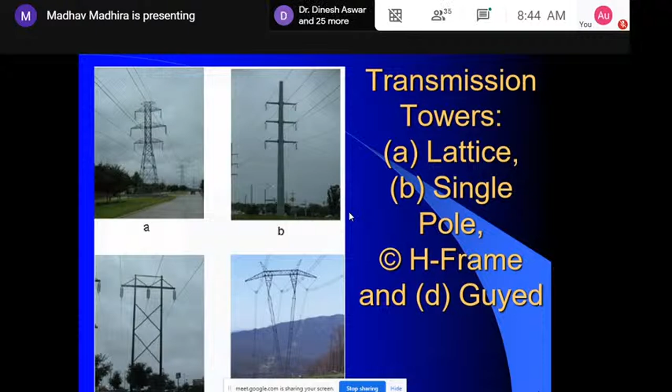Once you have a large lateral force, you end up getting a large moment also at the base. Many times it's a very challenging task because the gravity load is much smaller, while the weight effect of these lateral forces is not.

Many times it's a very challenging task because the gravity load is much smaller, while the weight of these lateral forces can be 2 meganewtons at a height of something like 90 to 120 meters. So imagine the moment, it will become something like 220 meganewton meters at the top of the tower, and if you look at the bottom, you have to add another 40 to 50 meters too.

These transmission type foundations on the ground, some of them use inverted T type, but generally they are not adequate, so we end up going for pile foundations too. All these footings are supported by piles. So this gives you the kind of picture that you have.

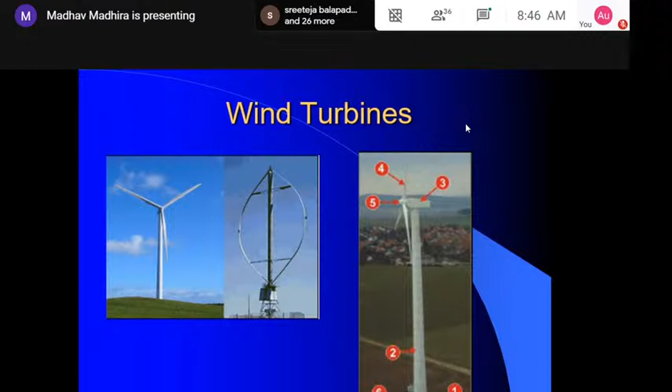We are not going to look at that part of it, but we may have to design, if you have a vertical axis wind turbine, for torques too.

Now all these piles, the kind of stage that it has gone up, you can see the height, how it is increasing, and you have very, very tall wind turbines.

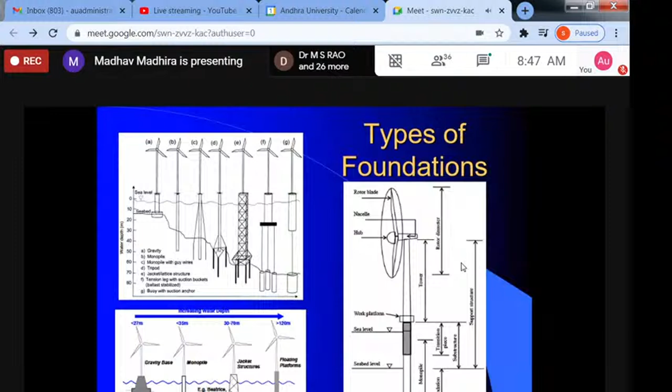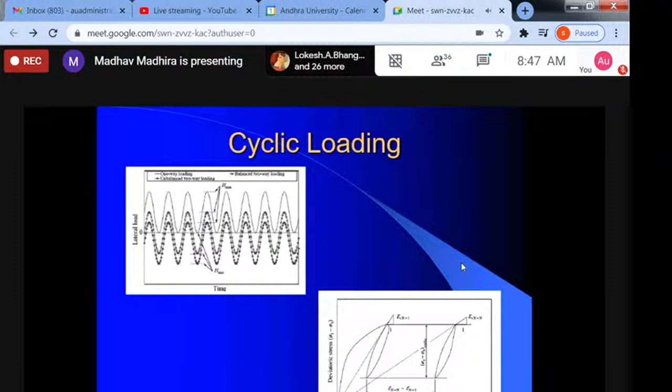I believe now they're about 120 meters high from the sea level, and this gives you the kind of challenge. All these wind turbines are subjected to cyclic loading because the wind is not there all the time, or the wave action is not there all the time. So you will be getting a cyclic load effect, in which case the stiffness of pile soil interaction starts degrading.

As you can see here, initially it could be some value. If you go for a number of cycles, you'll end up getting what is called the pseudostatic one, which needs large lateral displacements. If you look at the bottom one, you can see a large lateral displacement, after which it may behave pseudostatically.

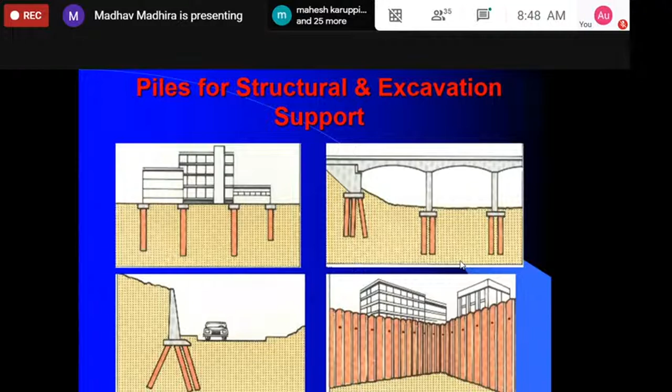Similarly, if you have a deep excavation, we go for sheet piles, diaphragm walls, secant piles, etc. Here again, because the soil has a tendency to move once you start excavating and removing the soil, you will have forces coming onto the pile because of the soil movement. So here it's excavation support, and the pile loading is due to soil movement.

These are some examples of pile walls for retention. And this is what you would see in most cities where people are going for 3, 5 basements in a tall structure. Imagine 5 basements means 5 into 3.5 or 4, a 20-meter excavation.

There is one deep excavation for metro, wherein it was something like 40 meters. And you had to provide either diaphragm walls, secant pile walls, or contiguous pile walls, and they're all subjected to the soil pressure. So you had to take care of that.

We are also using this, this is an example from Hong Kong, but we have done that in a couple of places in the Himalayas to support the slope, which is likely to move and fail. One of the ideas is, why don't we have pile support to the slopes? And if you have a tall structure or residential area next to a slope, you want to make sure the slope failure doesn't occur. One of the best things would be this.

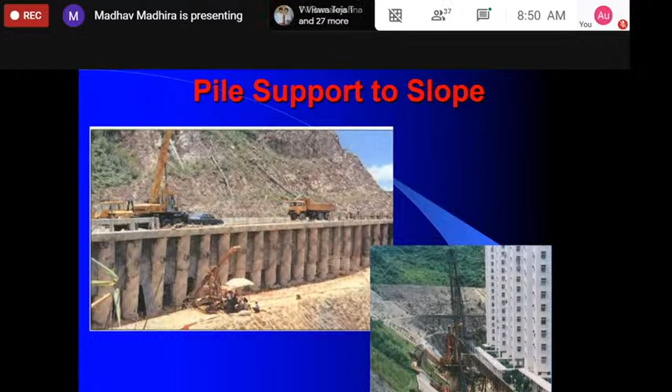Way back in 1970s, one of the dams in Himachal Pradesh had to be stabilized because of a shear zone they found out during construction. There was no way to change the design of the dam. So we had to provide deep well foundations to take care of the lateral forces in the slope or the shear zone. So this is how they work.

Most of the slopes are generally stabilized with piles at the toe, and this is where you can have even large diameter bored concrete piles. Off late, of course, we are able to now use some geosynthetic gabion walls to stabilize the slope, but this is a very common one in case you find that the surface support is not good enough.

So in an embankment also, below a bridge deck, you have to take care of it because the abutment is subjected to large forces. So they have piles below the embankment to take care of the lateral forces.

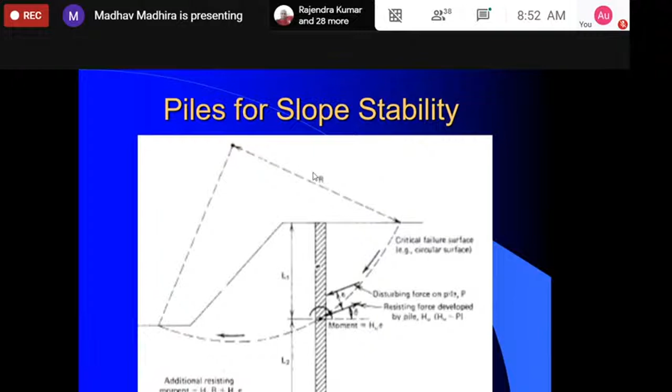So this is a very challenging one because the calculation of load in the active zone is much more difficult, because it's not a structural load, but a load due to movement, and we don't know how much. We're also using piles to resist ground movements associated with tunneling.

Whenever we have a metro tunnel, you may obviously have both vertical and lateral movements towards the excavation. No amount of care will prevent these lateral movements because even with tunnel boring machines, some movement does occur. And if you have a structure near the ground surface, it would obviously be subjected to these movements.

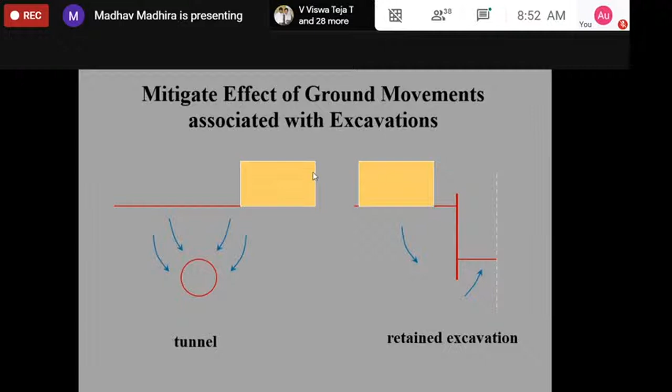So one of the best ways would be to provide reinforcement. That means you provide piles so that the building is not affected to the same extent. You may not be able to prevent it 100%, but you have to take care of it.

Just to give you an example, in Singapore, for one of the tunnels, if there is any building near it, the maximum movement they allow was 1 to 2 millimeters. That's all that building is allowed to deform. And the same thing is happening even here.

Essentially a project for a metro pillar—next to it, they wanted to do an excavation, and we had to provide a very, very complex support system, including micropiles, anchors, nailing, etc., so that the maximum movement a metro pillar can undergo is hardly 1 to 2 millimeters. If it is more than that, the track gets distorted and the trains get jammed or derailed.

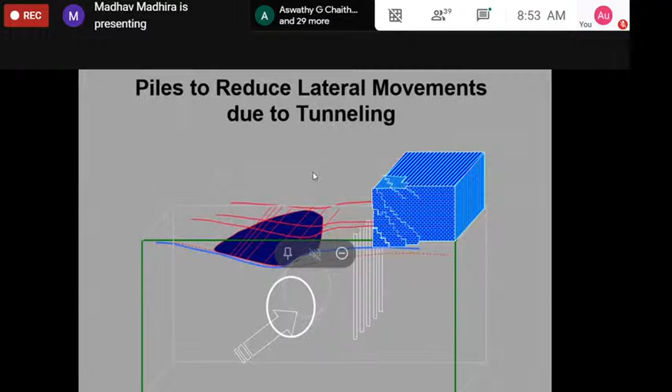So that's the problem. In addition to all this, we have the seismic forces, and they're all generated in the ground, which means the building is subjected to lateral forces because of the seismic action. The seismic wave moves up from the bottom towards the building, and you will have a lot of attenuation or magnification, particularly if you have soft soils.

So it's not as bad, but you still have to design for these accelerations, which are of the order of 0.12 to 0.16 for zone 3 and 0.08 to 0.1 in zone 2. You have to take care of these forces.

So when I'm looking at piles which are subjected to lateral load, the first classification we look at is the length. Depending on the length, we classify it as short, intermediate, or long.

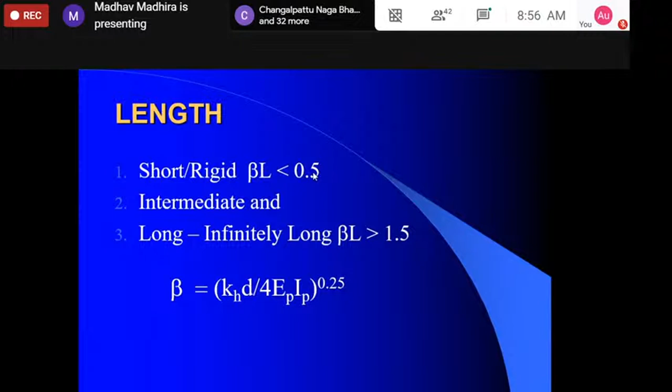One of the simplest ways in which we classify—you define a parameter called beta, which is nothing but the coefficient of subgrade reaction KH times the diameter of the pile, divided by 4 EP IP. EP is the modulus of elasticity of the pile material, IP is the moment of inertia, and we take this product to the power of 1/4, and that gives beta. Beta has units of 1 by L.

So if you have beta times L less than 0.5, the pile is treated as a short rigid one, which means it will just rotate, not deflect like a beam. If beta L is greater than 1.5, then it becomes infinitely long, which means it's fixed at the bottom, and only the top would be deflecting. The intermediate one is where you have deflections or deformations right from top to bottom.

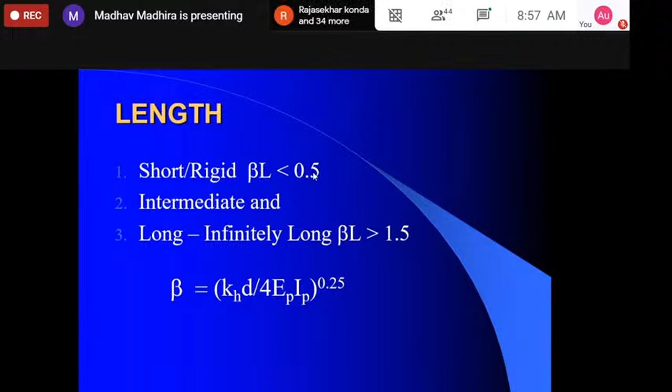Now, this classification depends on different methodologies we have. You may find different ones too.

Now, in terms of restraint, the head can be free, which is what you have in case of transmission towers or single pole ones, whereas most piles we have, which are embedded in a pile cap, the head is prevented from rotating, but it's allowed to translate. Please remember, when I say fixed, it's only fixed in the sense of rotation and not in translation.

So it can move laterally, but the shape is exactly the vertical one at that place. Similarly, at the base or the tip of the pile, if you do it, it's a floating pile.

I drive into, let's say, an Indo-Gangetic stratum where I have no hard rock. So even if I have a 20, 30 meter long pile, the bottom is free to deflect or rotate. That means free. Suppose I end up getting a very strong hard stratum, and I drive the pile hard into 1, 2, maybe 2, 3 diameters, then it's prevented from movement but allowed to rotate, which means in our beam theory we treat it as a hinge connection or pin connection.

Now, if I socket the pile into hard rock, maybe something like 5 diameters or more, then the pile tip is not allowed to rotate and displace. So that is true fixity with respect to rotation and displacement. Because of the beam action, these are all necessary for you to consider.

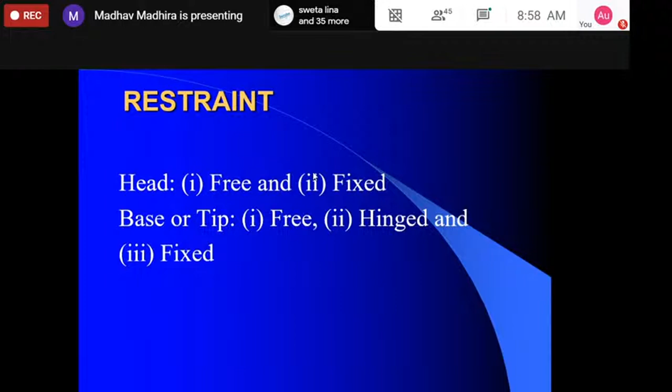Now let's look at the behavior of the piles, how they behave, in order to calculate the ultimate capacity. We have the classic theory of Broms, which I caution you is not valid anymore, but just now Professor Reddy said use IS code. I would rather ask you to use your judgment whether it is true or not. I want you to know that Broms came with this theory in 1964, ASCE. His experience at that time was based purely in Sweden, where they have extremely soft soils in some of the areas.

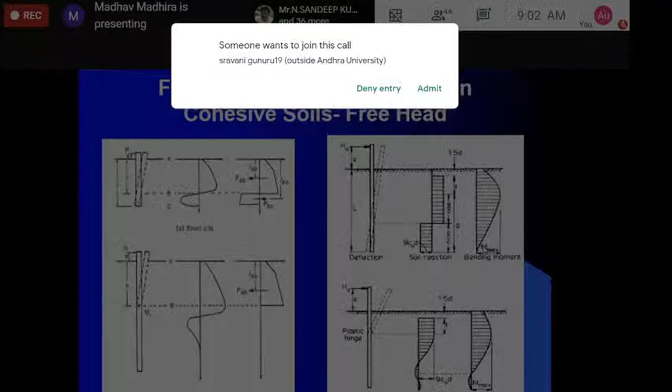Now imagine if the pile becomes longer. This bending moment keeps on increasing as you increase the length of the pile, and then you suddenly say no, the pile cannot take any more, it reaches its plastic stage and forms a plastic hinge.

If that happens, the mechanism is very different now. In the long pile, we treat the hinge here at some depth, and the pile rotates like a free one here because it becomes a short one. So you have this kind of pressure, and below is the other one.

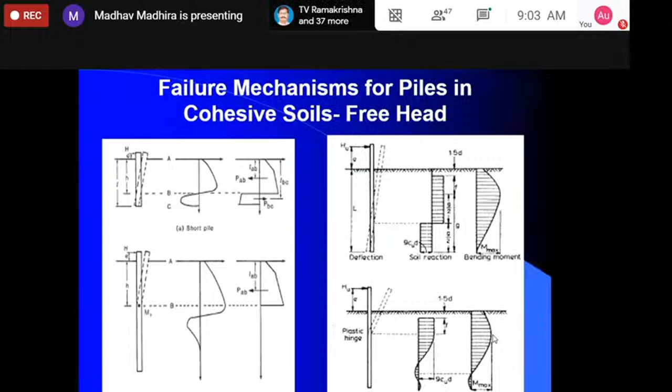You have to calculate now based on the plastic, what is the maximum bending moment or your moment. And this is how we do it in case of cohesive soils. Okay, that is for free head.

Now I want you to look at the fixed head one. So here we have the pile embedded in a pile cap, and the load is applied here. Because it's a short pile, it rotates like a rigid one, which means with the H, it simply translates to the right.

Now, if it is an intermediate pile, or you have the moment so high because of fixed end moment, it can form a hinge here and it rotates again as before. If you have a very long pile, you will end up getting a hinge at the pile cap and another hinge somewhere in between. So this is what happens for short, intermediate, and long piles in cohesive soil.

In each of these cases, I want you to look at the kinematics or mechanics. This is the soil reaction, and you can see the bending moment too. Because of the fixed end and all the load is here, the maximum bending moment occurs at the top. So the first hinge can form here as you keep on increasing the length of the pile. So for very short piles with no hinge, we use this kind of mechanism.

With intermediate piles, possibly one hinge here and then rigid below. So this is the kind of soil pressure distribution. These are all according to Broms' theory, which has been later modified by several people.

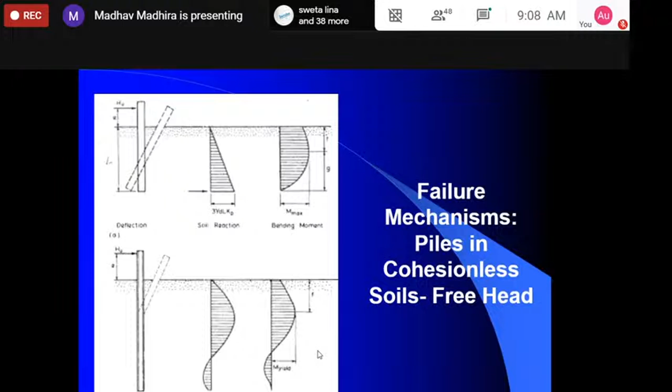This is a free head pile in cohesionless soil. If I have a fixed head pile, you can see very similar mechanisms. You have simple translation at the top.

So it's very easy to calculate the reaction in this case, linear increase, and H is equal to the area of this triangle. Please note that the lateral pressure is 3 times Kp times gamma into Z or gamma into L. And the maximum moment, the negative moment, is here.

If you increase it, you end up getting the first yield moment. And if you have a very long pile, you will end up getting two hinges, and we still do the same analysis. The analysis is very simple, but the mechanism is very important. So you have to be very careful with these two.

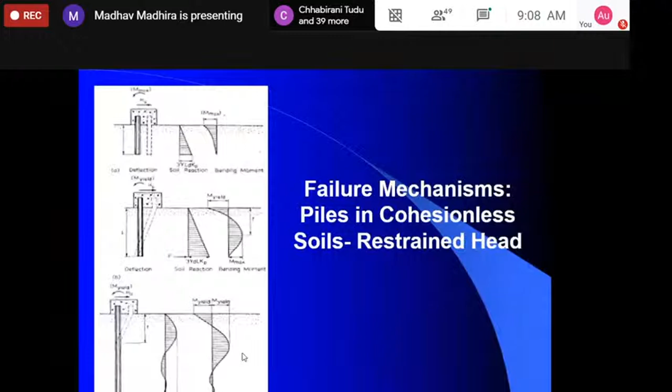If you have a socketed pile, I told you, if the socket is short, you end up getting a point of rotation. It's fixed, but it's allowed to rotate. And in the rock, you end up getting very large lateral forces, and we integrate for that. When you have a very large, long length, you can get a hinge here, and then you get this mechanism.

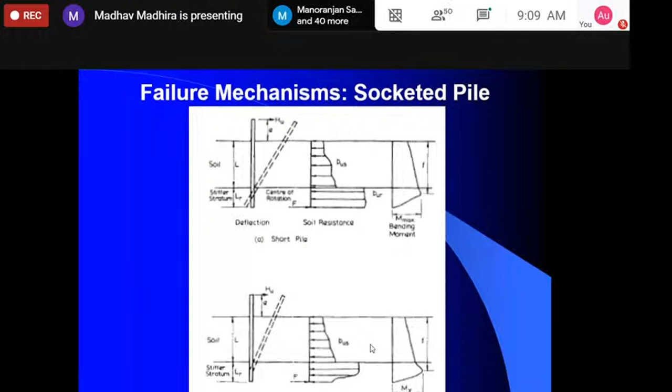Please note that here the socketing is very similar to the depth of penetration into the ground. Based on these, we have all these design charts available in our code also, but all of them are based on Brom's theory. I want you to look at the chart depending on the embedment, which is nothing but L by D ratio, against which you have ultimate lateral resistance in cohesive soil, P by Cu into D square.

Cu is the undrained strength, and D is the diameter. So you have a non-dimensional ultimate lateral resistance. It's a function of eccentricity, so E by D. As you increase eccentricity, obviously the moment increases, the capacity decreases. You will realize that P by Cu D square can probably be as high as 60 for maybe L by D of 14, 15, etc. It can reduce by a factor of 2 to 16 once you have a large eccentricity.

It's not a big thing in terms of eccentricity because the diameter of the pile is 0.6 to 1 meter. So if you have a tall structure or a single pole which is going up to 15 or 16 meters, you get E by D there. So you can calculate using this.

If you have a fixed head pile inside here, then the effect of eccentricity is not there. So simply you get it as a function of L by D, and you get fairly large restraint. You'll end up getting P by Cu into D of the order of 50, even for L by D equal to 8. Then you may say, what happens after that? Then suddenly you will get hinge too. So these are the kind of charts that we have.

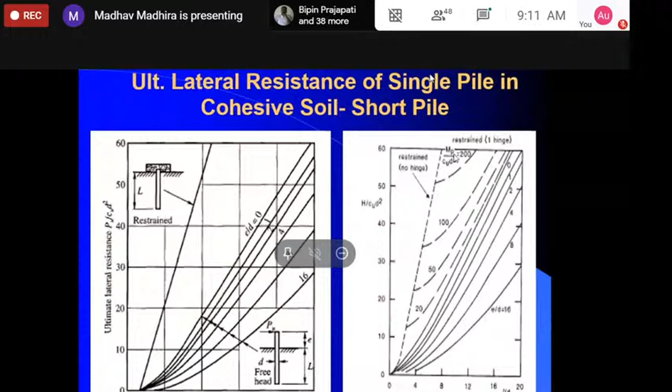So these are the charts that you have for piles in clay. These are for long piles, you can see here, and very similar ones too. What I would like you to do here is, on the right side we have long piles. This is yield moment by Cu into D cube, and it can vary from 1 to let's say 100 or 1000. H by Cu into D square is now restricted to a much smaller value. You can calculate for different eccentricities, and these are all charts available in our code. You can easily use them for your design.

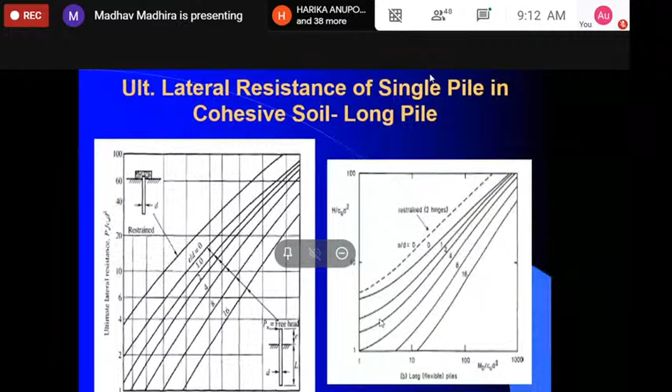For cohesionless soil, the analysis is very similar, but the quantities are very different. Again, here as a function of L by D and a function of E by L, these are for free head piles. Here you have the lateral force, the horizontal force normalized by Kp into gamma into D cube. Please remember, gamma is unit weight of soil, so let's say it is grams per cc. You need to multiply by D cube to end up getting a force, and you normalize it.

You calculate Kp as a function of angular shearing resistance: 1 plus sine phi by 1 minus sine phi, a very simple expression. Here is our pile with eccentricity E. For E by L equal to 0, that means at ground level, the normalized lateral force is close to 200. But once you have eccentricity of the order of 3, it reduces to even less than maybe 45 or 50. And if you have rotation here at the top because of fixed head with one hinge, here are the design charts that we have for coarse soil.

You'll find them in the book or any of the codes you will find.

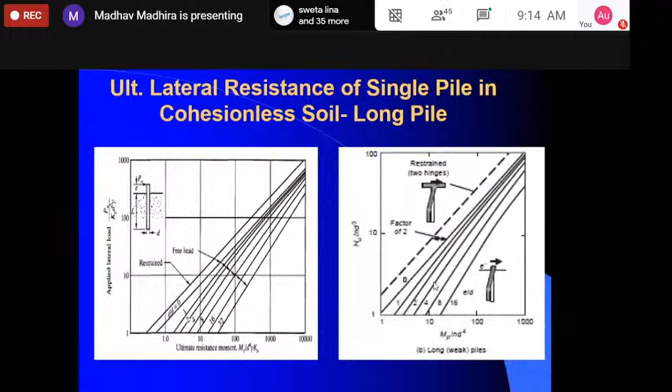In case of long piles, you have the ultimate yield moment normalized with Kp gamma into D4, because this is the yield moment. So with Kp gamma D4 and your normalized lateral force, you can see a curve for restrained head and free head values for different eccentricities. This is for long, weak piles, which means you have double hinges, and you have a different chart for this based on how you analyze - using L by D, the yield moment of the pile, and the eccentricity of the load, and based on that you get these results. What we found is that many times the lateral capacity is not enough.

People ask what should we do to increase the lateral capacity. One way is to increase the number of piles, but that is very expensive. So what we often try is to provide additional support through a sand or gravel blanket so that the top is restrained, or for the pile, like a vane, attach blades.

Doing this also by increasing the plan area, so when it rotates or deflects, you have more area resisting. A very common one, which we have been recommending, is to have a collar.

Recently we had a problem where the capacity was very low in a particular port structure. We said, why don't you increase the diameter of the pile at the top, so that will give more resistance. The pity is that in case of piles, it is only the top that controls. You may have very stiff soil at the bottom, but its contribution to capacity or reducing displacements is much less, because the pile is a cantilever, and cantilevers have large deflections - that's the problem.

You can also excavate around and pour a concrete plug here. Some people suggested, why don't you provide a beam? But this is possible only in case of a port structure where the direction of the lateral force is fixed. Then you can provide a beam to stop it from moving.

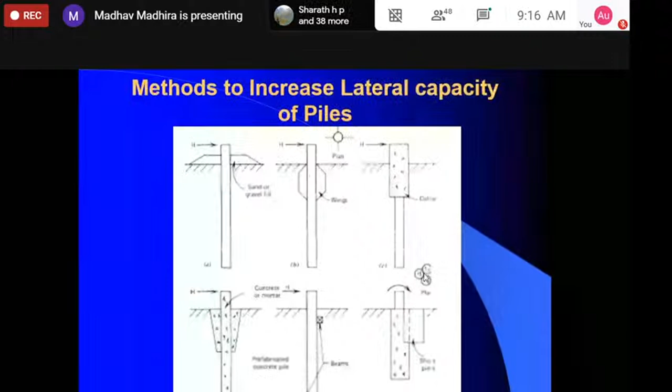Similar to that, we have a short pier next to the right, taking the lateral force too. So these piers can be provided in this fashion. These are alternate ways in which you can improve the capacity.

How do we do the analysis? As I said, the pile is a beam, and we need to find out its response. One of the simplest models is what they call the Winkler model, given way back in 1885 or so. He said to replace the soil with a set of springs, and the spring coefficient is called the coefficient of subgrade reaction. So we put the pile and then springs along the length. The original Winkler model has all the springs unconnected, which is again a limitation.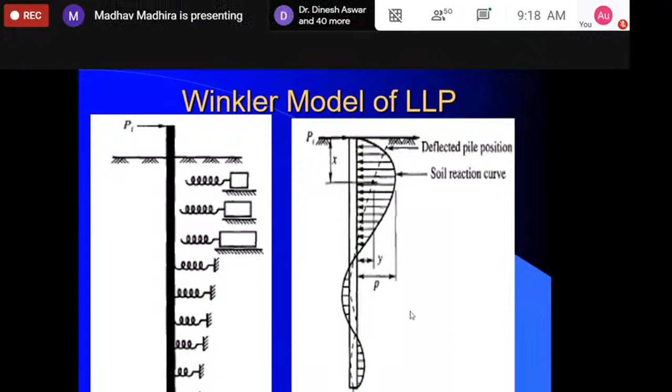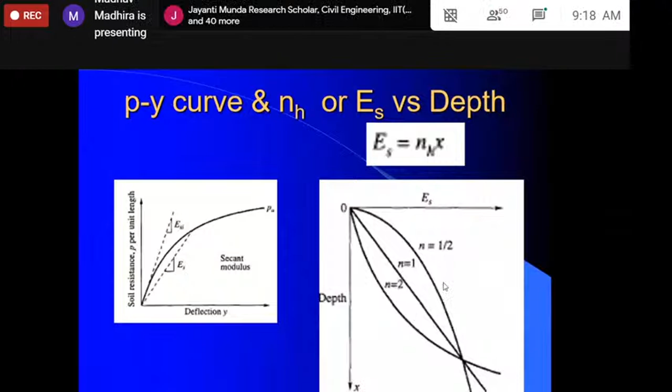Now, when I do this, I do a simple load test - a lateral load test, wherein I have deflection and the soil resistance, the P-Y curve as they call it. P is the soil resistance, normal force or normal stress on the pile, Y is the deflection. When you do a simple laterally loaded plate load test, you may get a curve of this kind.

The problem is that the initial portion is very steep, so you get a high tangent modulus, but actual displacements are large, so you may have to use a secant modulus value. Please remember, the modulus of subgrade reaction is not exactly a constant. You have to look at it in terms of displacement.

Now, when you come to sands, obviously at the top there is no restraint, so the modulus or coefficient of subgrade reaction is 0. It increases with depth, and it can increase in any fashion, non-linearly, but most of the time we assume a linear increase, meaning the modulus of deformation or subgrade reaction increases linearly with depth. We use this parameter NH, the rate of increase of modulus.

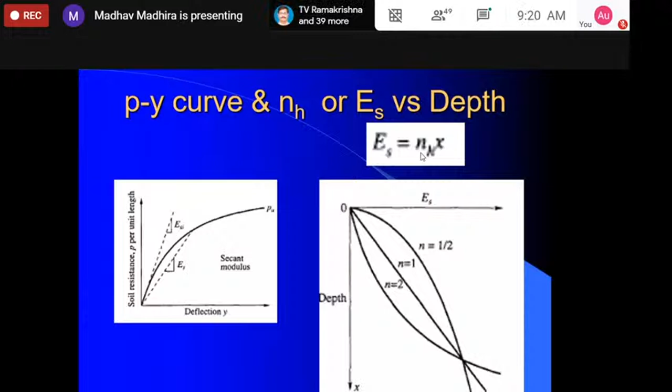So we had to analyze this, and this is what I want you to realize. As I said, the pile is subjected to vertical force, moment, and horizontal force. At the top, the deflections are very large.

Two things can happen: both the lateral capacity increases, because at greater depth it can be more, and the stiffness is more too. So the non-homogeneity is very important in all pile analysis. If you go deeper, you can see the PY curve is much steeper and you get larger capacity. So this spring constant honestly is not a unique value.

It depends on the depth. It depends on the soil at different depths too. So we have a lot of choices that you have to make in terms of choosing these parameters.

So I picked up some of these correlations which are available from the literature. If you do a simple plate load test, I get the 300 millimeter plate, right? So I can get the displacement, and if I want to get the coefficient of subgrade reaction for horizontal condition, this is how they recommend it.

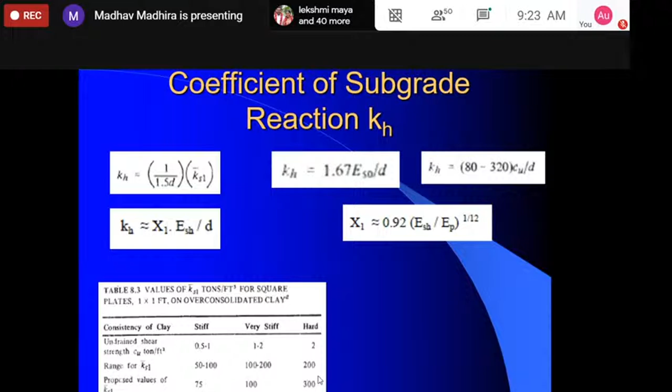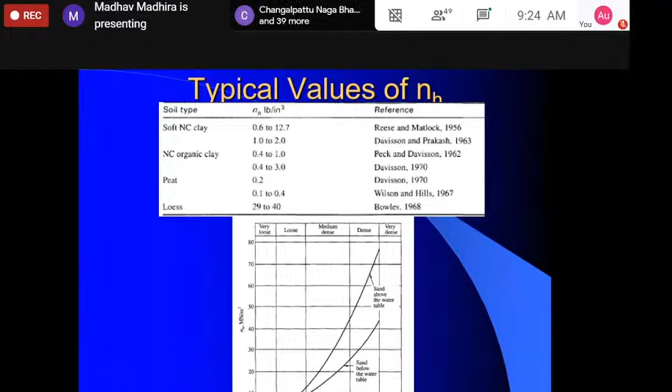The NH values are given again by the relative density of the soil. If you have sand above the water table, NH can increase from something like 10 for loose soil, relative density of 30, up to 75, and for very dense soil around 80. But below the water table, the values become maybe half to one-third of that.

So how do you estimate them? We use simple kinematics, a simple rotation or beam approach. For these deformation conditions, we have slightly different criteria for different types of piles. For a free head pile, if beta is greater than 2.5, you treat it as a long pile; for a short pile, beta should be less than 2.5.

If beta is less than 1.5, it is a simple rigid pile, and you can calculate the deflection and rotation very easily. The maximum deflection equals 4 times H into (1 plus 1.5E by L), where E is eccentricity, divided by KH into D into L. Please remember KH is the most important parameter here.

A structural designer will tell you what H and E are. As a geotechnical engineer, you decide on the length and diameter, but the most important parameter is KH - should you take KH at the top, somewhere below, or along the length? Use judgment, because that makes a big difference in all your predictions.

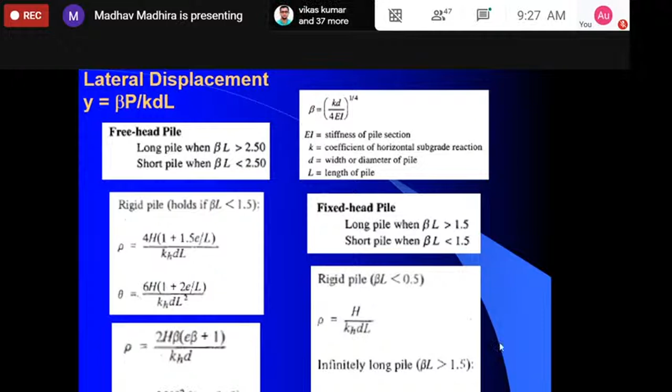These are the ones where beta is between, let's say, 1.5 to 2.5. You can see initially they're all constant because they're rigid piles, and once you have the large ones, it becomes redundant to look at it that way.

For beta L from 1.5 to about 2.5, you'll see it's a function of beta L. The coefficient of displacement is a function of eccentricity and the dimensionless length beta L, which we defined just now - it's the same value. So the more eccentric the load acting above ground level, the larger the displacement, which is very significant in terms of displacement.

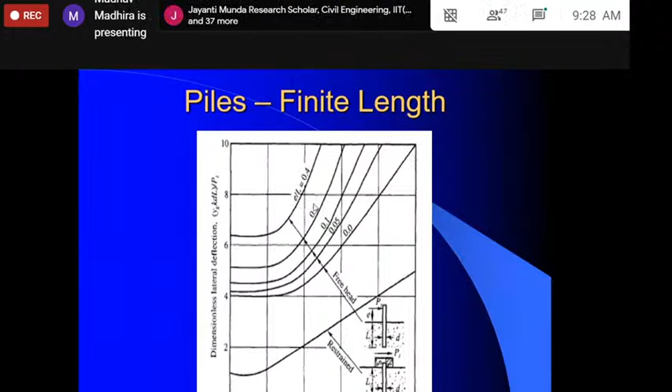Even a short pile with beta L equal to 2 will have this coefficient around 8 to 10, whereas if the eccentricity is very small, it's much less. This is how it goes for free head piles, and this is for a restrained head pile - once you put it in a cap at ground level with no restraint and no eccentricity, you'll have much smaller displacements.

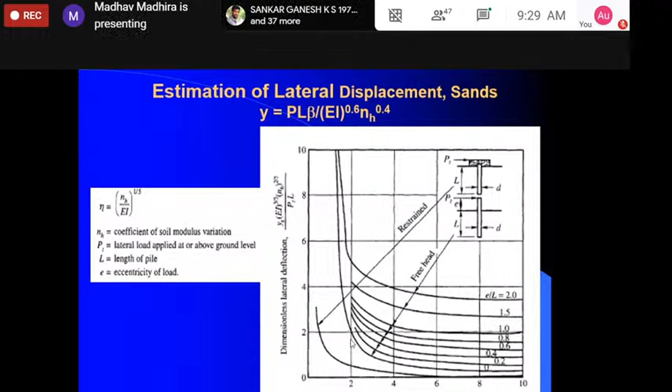Here are the curves for a free head pile at different eccentricities, and this is for the restrained head pile. So we use this chart to predict based on the Winkler hypothesis.

This is what we normally try to look at, and I would like you to look in terms of critical length. You can find out how much the critical length is from this simple expression, and for a homogeneous soil, we can use the simple expressions here for both lateral load and moment.

I told you only in terms of eccentricity, but if you want to separate out the effect of lateral force and moment, this is one simple way of doing that - same Winkler model, but the expression now is in terms of LC, the critical length.

If the length is more than the critical length, then it becomes significant and you use this value. So you have the contribution from the horizontal force and the contribution from the moment from this expression, and the rotation also is very similar. We can use the calculations to do that.

These are the expressions for non-homogeneous soil, which means sands, where the coefficient K is a linear function of depth. In this case, the critical length LC is defined in terms of NH, to the power of 1/5, and the displacements are for lateral force and the moment - this is what we use in our expression.

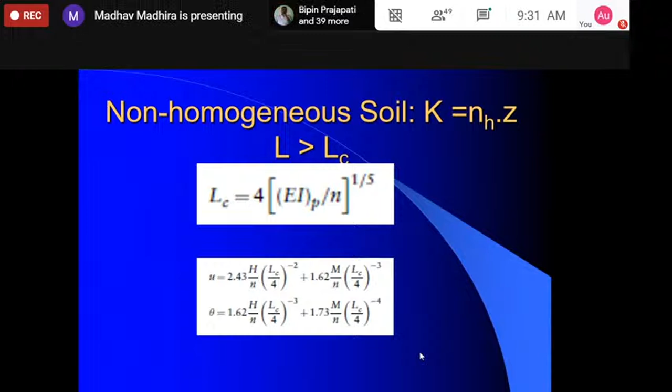However, we found that this Winkler model is not exactly good because soil is treated as a set of springs. Poulos, way back in the 70s, developed an approach now used in many design problems, and we use it in all our modern design checks too. The soil is treated as a continuum, which means it has a modulus of elasticity, and the springs are in a way connected.

I don't want to go into the design analysis of this, it's fairly complicated, but the best part I'd like you to look at is that the deflection is a function of modulus of deformation of the soil and length of the pile. This is the influence coefficient for displacement due to force, and this is for displacement due to moment, another influence coefficient. It's also given in terms of factor of safety with respect to ultimate load, so you are looking at elastoplastic deformations.

Rotation, theta, is given in terms of this, but everything depends on this coefficient Kr, which is nothing but relative pile flexibility. To me this is a very important parameter: Kr equals EP times IP divided by Es into L4. EP is the modulus of elasticity of the pile, IP is the moment of inertia of the pile material, Es is the modulus of deformation of the soil, which you can normally get, and L4 is length to the power of 4.

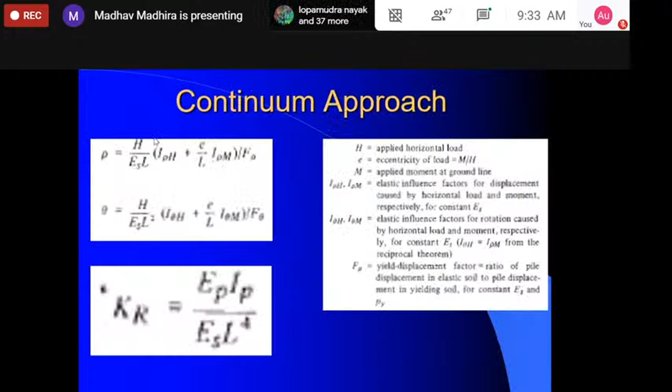This is what I'd like you to adopt in all your designs. For the free head floating pile, if I calculate Kr, as I showed, a very simple term, EP IP by Es into L4, once you have Kr, I can calculate I rho h, and substitute it here. Similarly I can do I rho m.

Here is I rho m, and you can get that, and here is I theta m, the influence coefficient for rotation due to moment. I want you to see here, once you have a very high value of Kr, more than 10 to the power of -1, it becomes rigid and the coefficient becomes constant. For intermediate or highly flexible cases, the I rho h keeps increasing, and below 10 to the power of minus 6, highly flexible, you can't have any design of pile foundation.

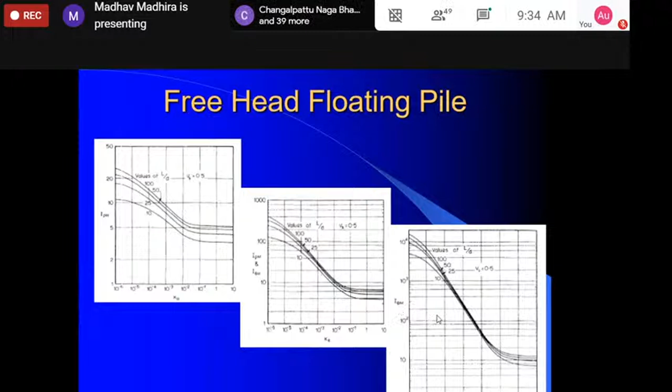The charts for I rho h, I rho m, that means influence coefficient for displacement due to moment, and using compatibility, it's the same as influence coefficient for rotation due to horizontal force, and this is influence coefficient for rotation due to moment. For the fixed head pile, we have very similar values too. You can see I rho F, there's no rotation here, and you have much smaller deflections, obviously, and the coefficient is very easy to calculate too.

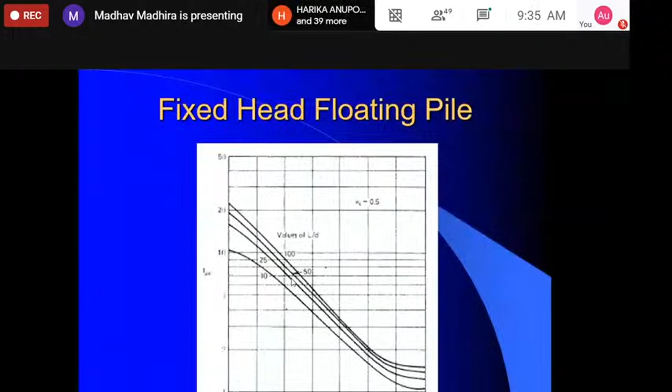So, as a function of L by D, usually our L by Ds are in the range of 25 to 50, so we can pick up any value in this range, or you can interpolate that too.

Now, when E is increasing linearly with depth, instead of Kr, we have Kn, which is EP IP by NH, the rate at which the modulus is increasing with depth, into L to the power of 5. So we have solutions for these two. I'd like you to forget the Winkler model. You may do it at the first iteration, but if you want to do a final design, go for this continuum approach, and we have influence coefficient due to horizontal force.

This is influence coefficient for horizontal displacement due to moment, or influence coefficient for rotation due to horizontal force, and this is influence coefficient for rotation based on moment too. All of them are functions of Kn, defined as EP IP by NH5. If you have a socketed pile, meaning driven into hard rock, hardly 1 or 2 diameters, then you can end up with two conditions.

If the socketing is very small, you have pin condition. If the socketing is very large, you have fixed condition.

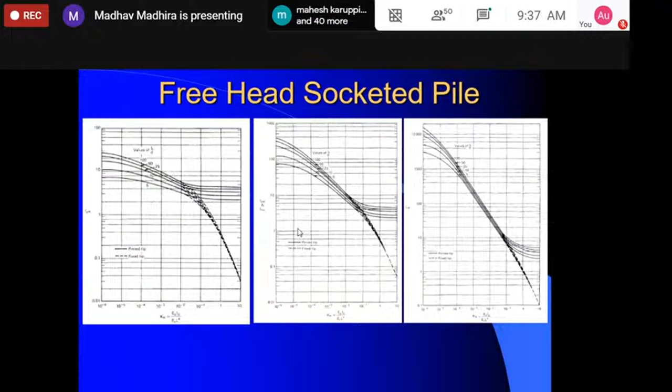So these are the design charts you will get from many standard books like Poulos and Davis, etc. We can design them. The other one I want to talk about now would be, what do we do in case

of buildings on piles due to earthquake? This is a very challenging job because once you have a building in a seismic area, our conventional belief is that providing piles will help. But please remember, if the soil here is fine saturated sand, it may get liquefied. So the damages can be very, very significant, even though you may have piles.

There could be two reasons. One is due to inertial force on the building, and the second would be the kinematics of the ground itself. And if the soil at shallow depths gets liquefied, which is what happens most often, obviously the lateral support is gone. Our coefficient of subgrade reaction becomes zero, the modulus of deformation becomes zero, and the whole pile system may not function at all. So the kind of different failures possible would be something like this.

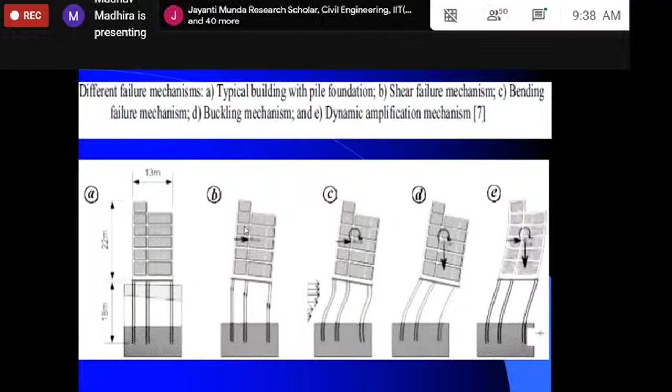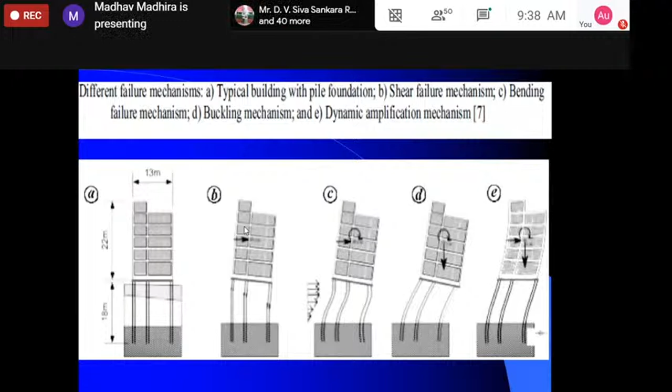Please remember, these are all the inertial effects. The effect of earthquake on the building would be to cause large displacements, large moments. So you can end up getting pile buckling, shear failure, bending, or even dynamic amplification so high that large deflections may take place too. So in general, if you have to design a tall structure in a seismic area, you have to be very, very careful. No matter how much you provide, the problem would be liquefaction.

And if you have a soil which is likely to get liquefied, what happens? There is hardly any resistance here. So if I look at the factor of safety, it is less than 1. I have fine sand, clayey sand, or poorly graded sand, so there is hardly any resistance to the piles. And you know that the resistance only in this region is important for lateral forces. So even though you have provided below a non-liquefiable layer, this is what happens most of the time. If you're designing in India, we did a few projects for Guwahati, and this is what happened. You will end up getting very low factors of safety.

And when we do the liquefaction analysis, look at the SPT-N values first. N values are all less than 10 to a depth of something like 8 to 10 meters. So obviously this soil is going to get liquefied. This is a clayey sand and fine grained sand. The factor of safety is less than 1, which means this area is going to be liquefied.

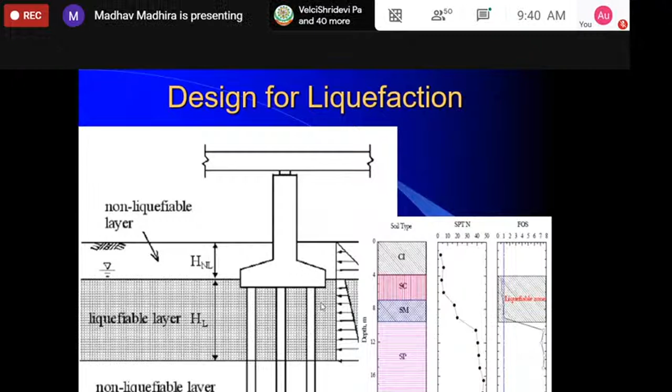So once you have liquefaction, there is hardly any resistance to the soil, and you will end up getting the whole pile within the liquefied zone acting like a cantilever. There is hardly any resistance. So you may have a very long pile, but the pile is now fixed only in the non-liquefied zone at the bottom. So you'll end up getting large deflections, and it's very, very difficult to design them for these earthquake conditions.

So it could be also both inertial and cyclic. The building is shaking, so it gives you inertial forces. You have the kinematics, the lateral spread, the soil itself is moving, and you will see the pile moving with the soil or relative to the soil. So this is the problem we'll have to design for.

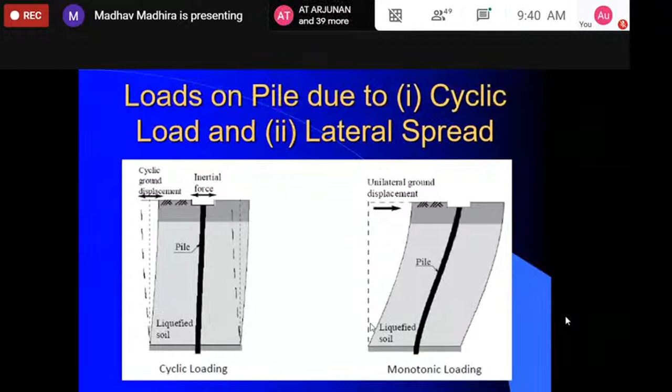So in order to do that, what people recommend is you try to calculate what is called the liquefaction potential index, which is a function of Fz, which is a function of your factor of safety against liquefaction. And then based on that, W is of course the displacement, or the way in which the displacement varies with it. So it decreases from 10 minus 0.5Z, and you calculate LPI. And if LPI is very small, let's say 0 to 2, there is no problem.

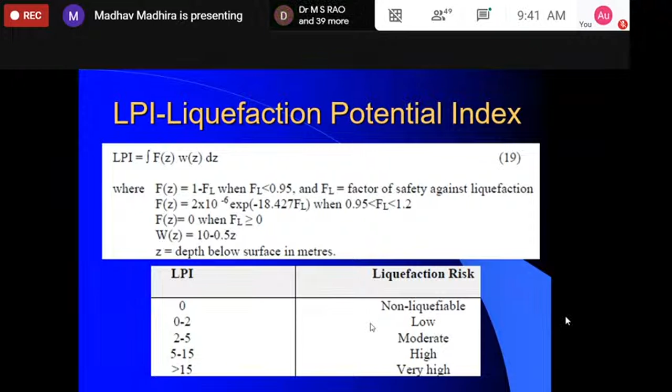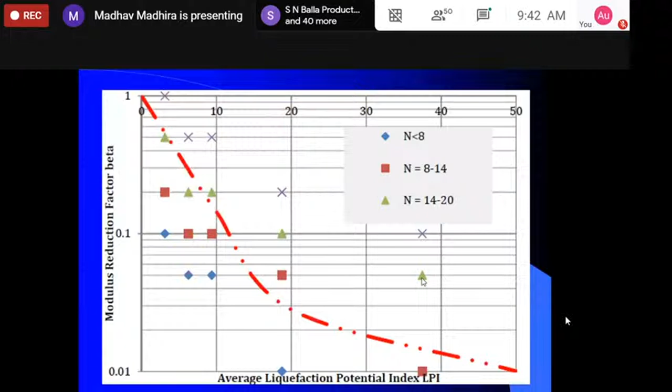So we had to be very, very careful in terms of designing pile foundations to take care of seismic load. You have very small subgrade reaction. It can reduce to something like 0.05, 0.02, which is a very small value. It doesn't matter even if N value is 14 to 20, it reduces, which means normally we say N less than 10 is where seismic liquefaction is very important. But even N equal to 14 has given us these values. These are the kind of predictions we get now, validated with experimental data.

So in one of the projects, they had bored cast-in-situ piles for a seismic area. I think this is probably where we talked about Delhi Metro. We also asked, can I prevent liquefaction by forming stone columns or gravel drains? We were trying to convince them that instead of providing bored cast-in-situ piles, why not use stone columns? It's also useful in terms of carbon footprint.

I don't know how many of you realize that when you use concrete and steel, the amount of carbon dioxide generated is phenomenal. One ton of cement to manufacture generates 1.5 tons of carbon dioxide. One ton of steel generates 2 tons of carbon dioxide. So if I can do a sustainable design, I would always recommend you go for that.

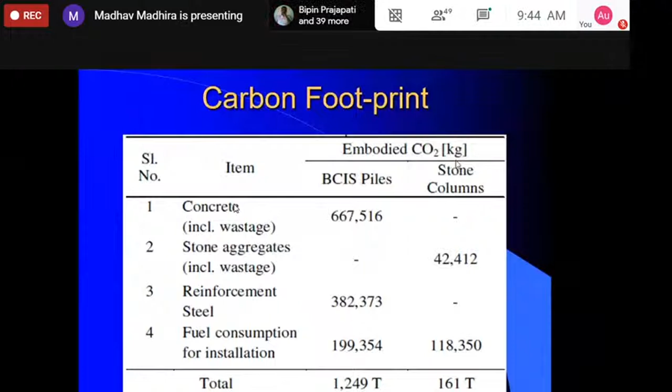For a typical project, if you work out the carbon footprint using bored cast-in-situ piles, for each pile you're generating a carbon footprint of 1,249 tons. Whereas if you go for stone columns, it's hardly 161 tons. Even otherwise, I would recommend we go for some ground treatment so that we prevent liquefaction rather than design for liquefaction. I want you to realize this is how we had to look at it.

Liquefaction occurs because the soil is in a loose state. If you visualize sand particles in a loose state, the grains are sitting one on top of other. But during an earthquake, pore pressure develops and the particles tend to collapse. But if I can densify the sand to get a dense state, the void spaces become small, and I can easily achieve that dense state without any problem, preventing liquefaction. How do we do that?

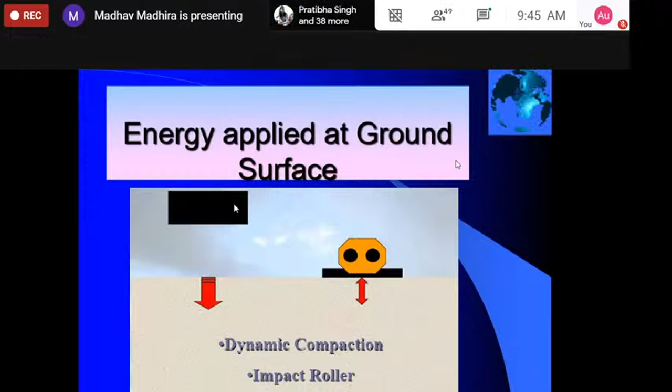We can apply energy at the ground level. You can tamp it with a heavy weight, or provide a vibrator, vibratory roller, or vibratory plate. This is good for the top 5-7 meters. Heavy tamping is good for 5 to 10 meters, whereas the vibratory plate is only for 1 or 2 meters. But if you want to densify the top 5, 10, 15 meters, you go for compaction piles, what the Japanese call sand piles, or vibrocompaction.

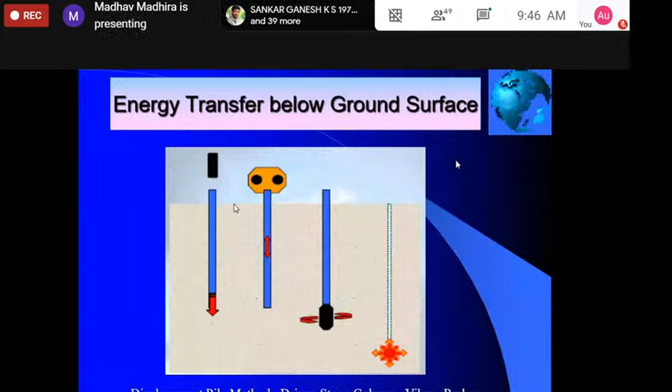For very deep treatment you can use explosives, though I'm not recommending that for our case. When I look at vibrocompaction, we provide this vibrator, it goes to the depth. The vibrator needle goes down, and once it reaches the required depth, the vibration itself densifies the sand, and you get a very high dense granular material that becomes very stiff and does not liquefy at all.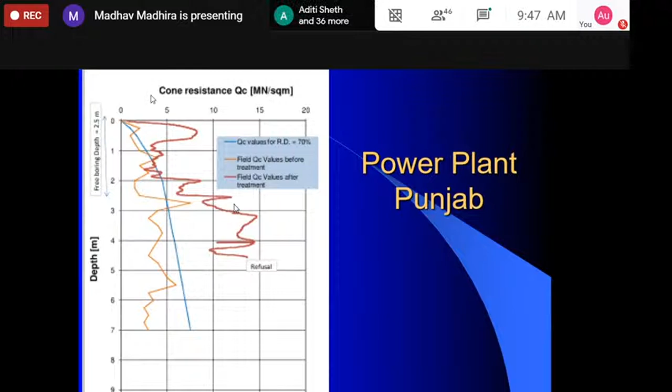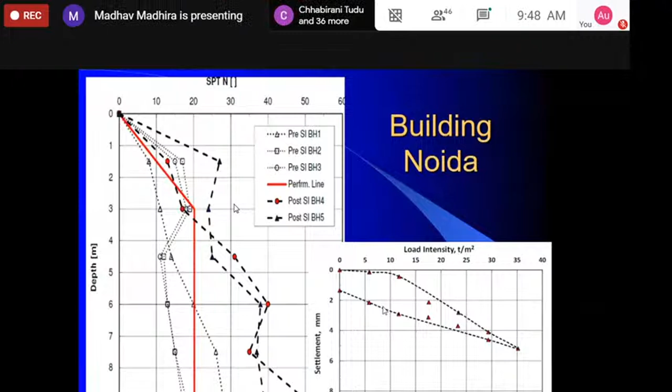This is for a building in Noida, Delhi. You can see the initial values were 10, 15, etc. But after ground treatment, they all became more than 15, 20, even 30. They wanted a verification in terms of plate load test. If you do that, even under 30, 40 tons, you hardly get 5 millimeter displacement or settlement, which means the required densification occurred. This was, of course, the design chart they expected, showing how much improvement you get, and you get much more than that. So ground treatment or engineering of ground is very important.

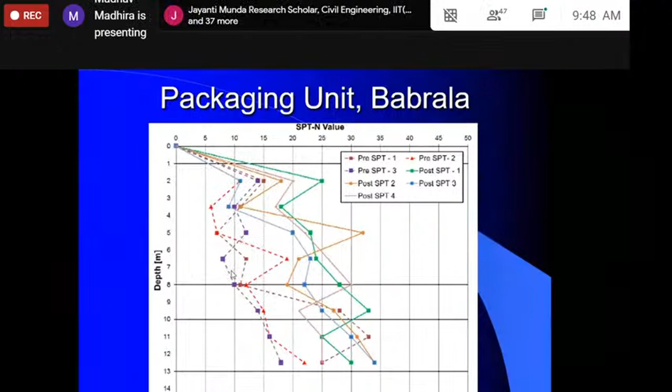This is in Western UP, another packaging unit, where they had initially very low values in the sandy silt or silty sand. Once you do vibrocompaction, the values have all gone above 20 to 30, which means you can be sure that there will be no liquefaction here.

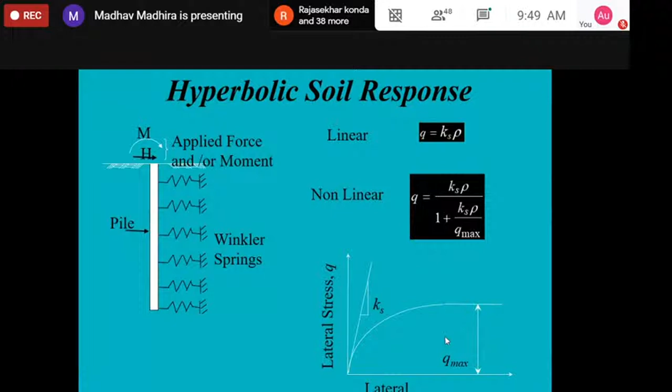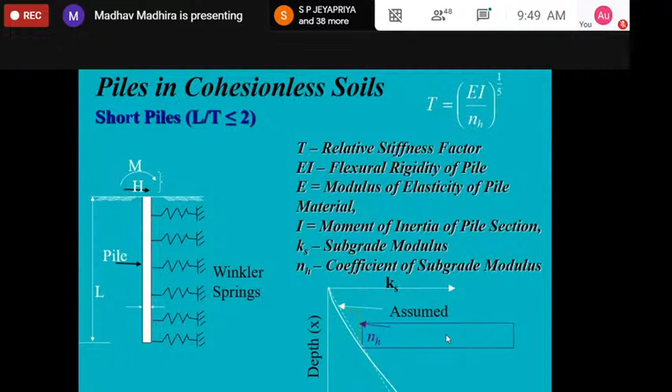Now I just want to briefly go over how you can design the whole thing based on displacement. In terms of piles, we have to be very careful. Professor Padmavati at JNTU did all this work, and we were trying to analyze based on the nonlinear response of the pile-soil interaction. We combined all this analysis in our design for various cases, looking at the whole response, not simple linear elastic. We also did it for both cohesive soils and cohesionless soil, short piles and long piles. We do the usual mechanism, and we were trying to compare our results with what others are doing.

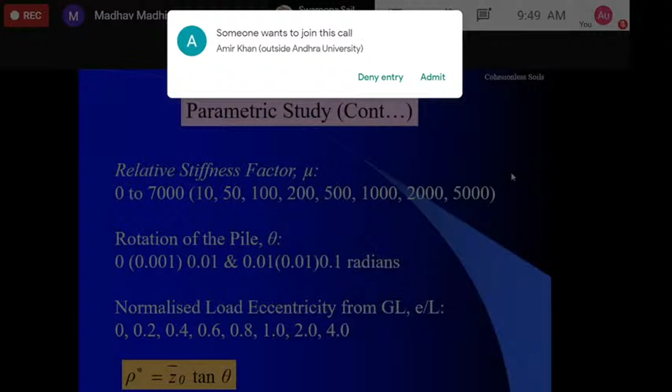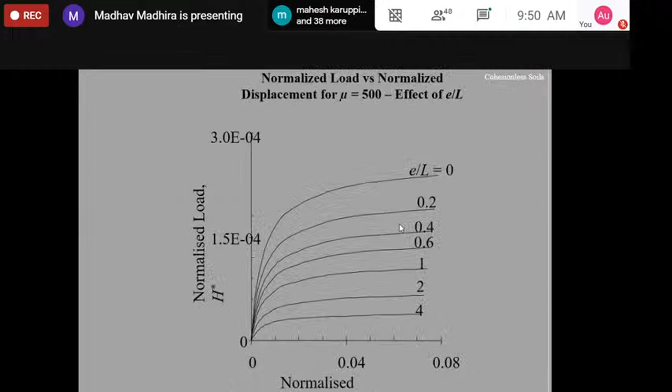But I'd like you to come back to this, this is what I want to show. This is what Broms has given, but we found depending on our assumed value of Kp, it can be very different. So please remember Kp is important here. We are comparing with the published data, and the code doesn't always help.

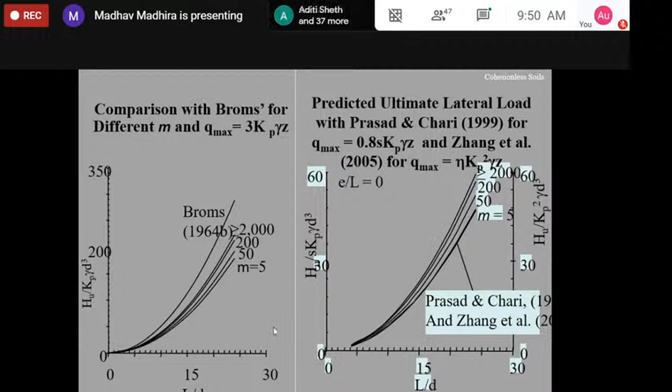More eccentric load, it becomes more. So we are trying to compare with the published data, and you find that in some cases it's pretty good, but in other cases it can be very different. This is how it is. It's fairly good, I would say.

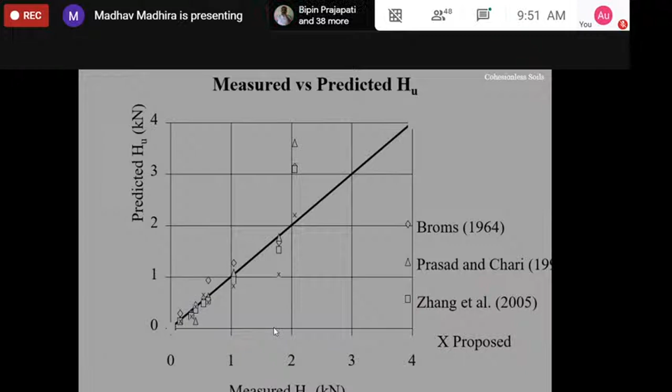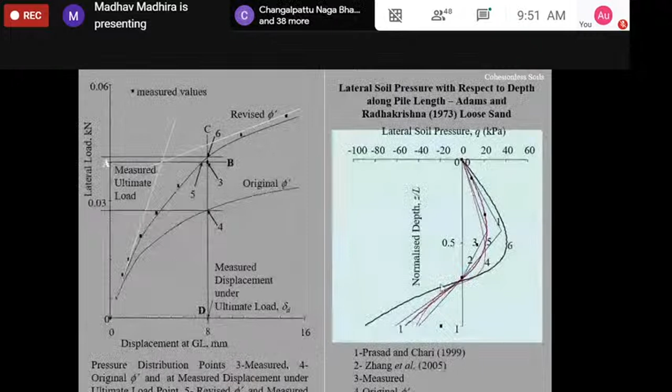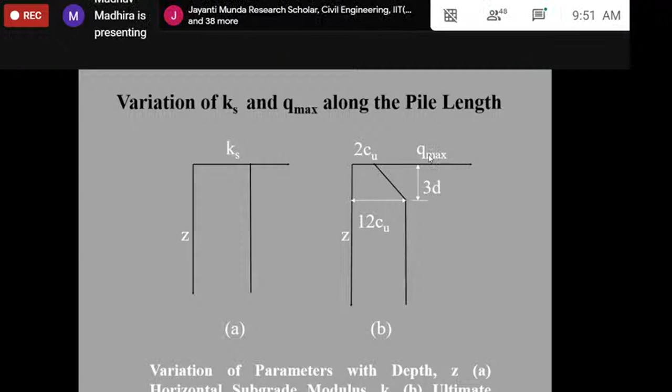Let me come to where we are matching with the values. This is how I'd like to look at the graph on the right, and what others have predicted and what Dr. Padmavati predicted is very close to the measured values in many practical situations. So we can do the analysis more rigorously, and we don't ignore the top. We were saying the resistance increases from ground level up to a depth of 3D, and then we calculate the whole thing.

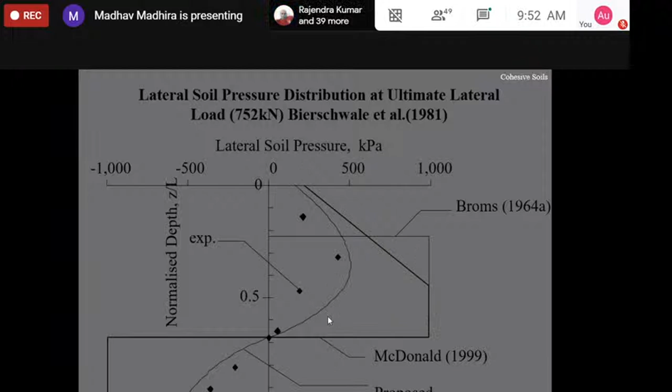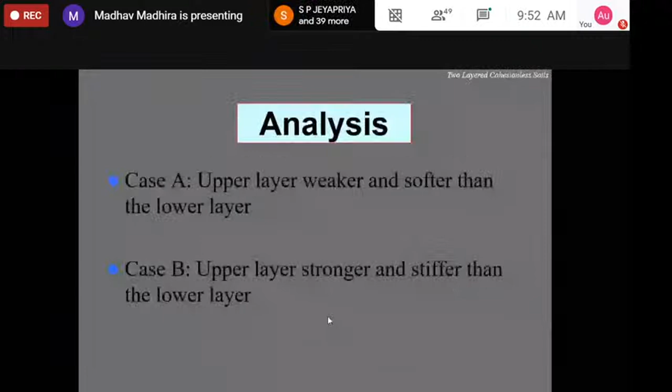We also did some work for two-layered soil. Those of you who would like to pursue this, it's a good problem to work on.

This is how we can validate your result.

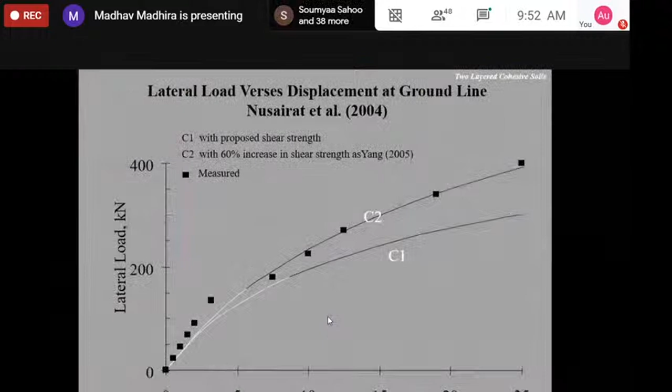Good morning, sir. Good morning. This is Dr. Rashekar from Andhra University, assistant professor. My question is...

In modeling a pile using the p-y curve method, how do we model the pile using springs, and how many degrees of freedom, sir? For a laterally loaded pile, I have only two degrees of freedom for the static condition - lateral movement and rotation, that's all. I don't consider degrees of freedom in terms of vibrations or dynamic load. We don't design for dynamic load for most buildings; that is beyond what I covered. I haven't done dynamic analysis of piles, only static and pseudo-static. Cyclic design is a very complex problem. If you're designing for dynamic loads under seismic conditions, doing spectral analysis or amplification, you're designing the building for multiple degrees of freedom. That is very difficult - I haven't done it, and this presentation doesn't cover it.